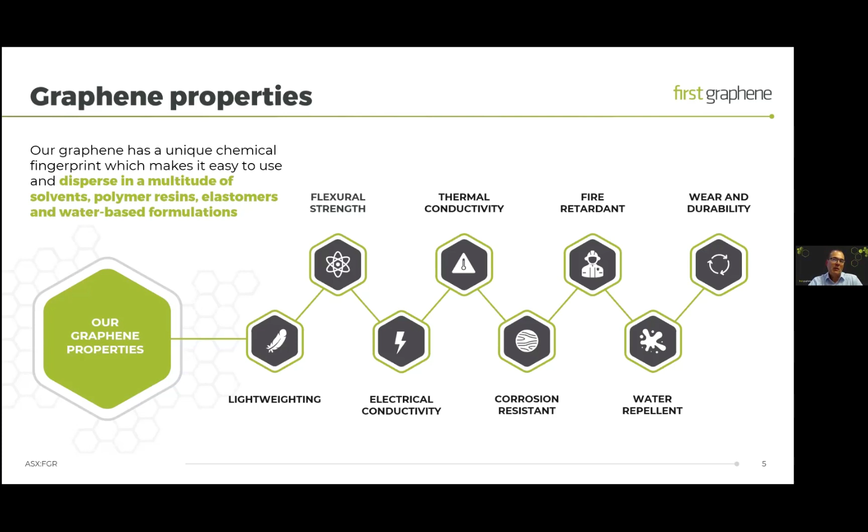So we're an Australian-based company. Our major manufacturing site is in Henderson, which is Western Australia. In the UK, we are a tier 1 partner at the Graphene Engineering and Innovation Centre, which is in Manchester. And we've been an active participant in getting graphene registered as a new substance in different regions around the world.

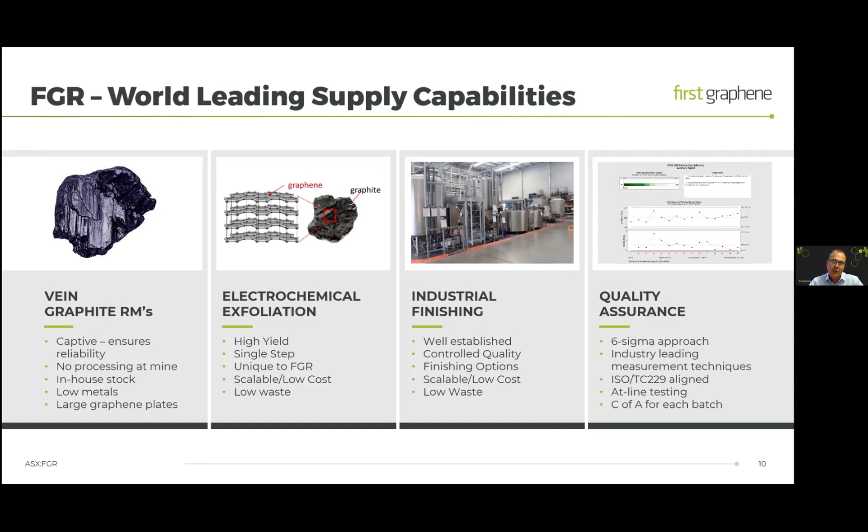The PureGraph product that we manufacture is a really interesting material because it is high aspect ratio, thin platelets, and we allow a small amount of oxidation at the platelet edges, which means that the platelets are easily dispersed and available for functionalization also. So we believe it's the highest performing graphene additive that you can buy in tonnage quantities. As I said, it's a pristine high aspect ratio platelet.

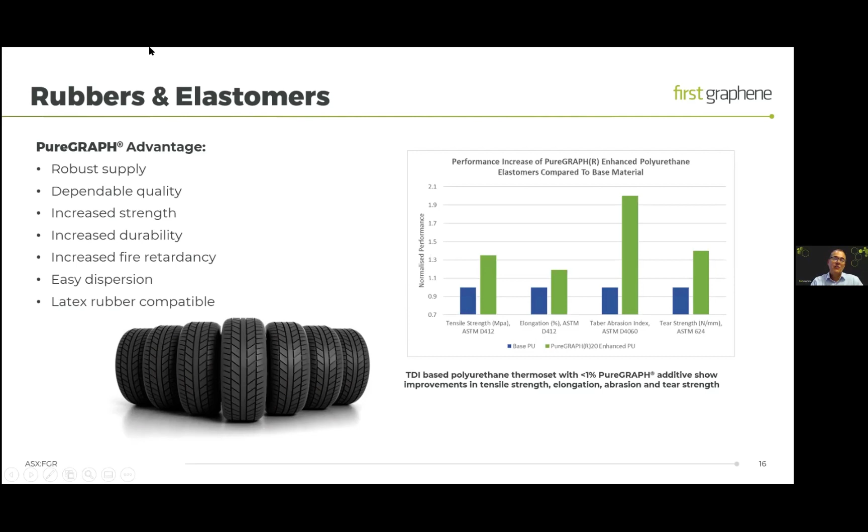So looking across this chart, you'll see we get significant improvements in tensile strength and tear strength in this elastomer, improvements in elongation, and really significant and positive changes in the abrasion performance, which we're now taking through to specific applications. So some of the customers and applications we're working with in rubbers and elastomers.

So with Steel Blue, we have an opportunity for PureGraph enhanced footwear. So Steel Blue manufacture specialist safety boots. And they're looking at graphene as an additive in multiple components within the boot to make the boot lighter, more comfortable, improve the grip, and improve the wear resistance. And we've been working with Steel Blue for probably 2 years now, and they will launch a PureGraph enhanced safety boot shortly in 2021, and they're a current sales client.

The second example here is newGen Group. So newGen are a supplier of wear liner systems to the mining industry in Australia. They've now launched a product range called ArmourGRAPH. ArmourGRAPH is typically a rubber system that includes our PureGraph as a performance enhancer. They've got tier 1 mining companies who are currently evaluating these and moving to adoption, and their interest, of course, is based on reduced cost of ownership.

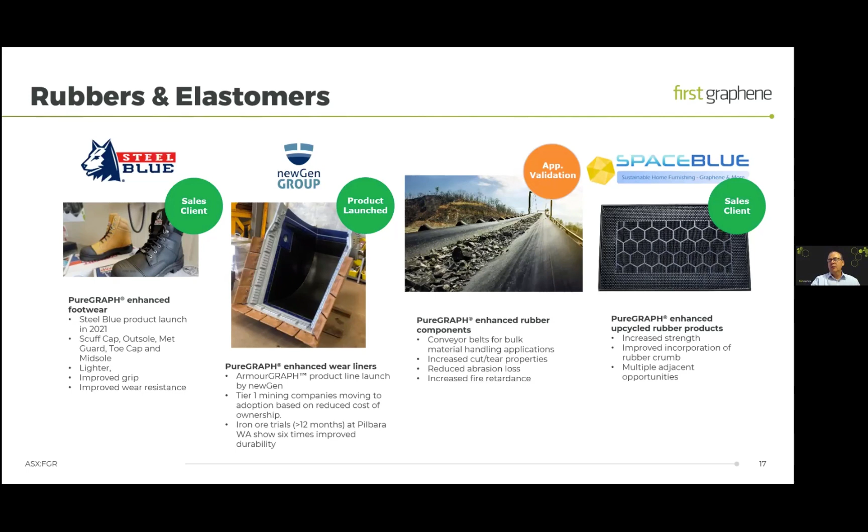So the next sector is composites and plastics. Here again, the PureGraph advantage is supply and quality, but in composites and plastics, we're seeing increased strength, increased durability, and improved barrier performance. So water, chemical, and gas barrier performance. The PureGraph materials are very easy to disperse into resins and plastics.

Some recent work that we just published an update on from the University of Warwick in the UK shows that the PureGraph materials are readily incorporated into thermoplastic matrices through normal extrusion processes. We can make very high concentrations, so 30% by weight concentration master batches, and plastic master batches are now available from First Graphene.

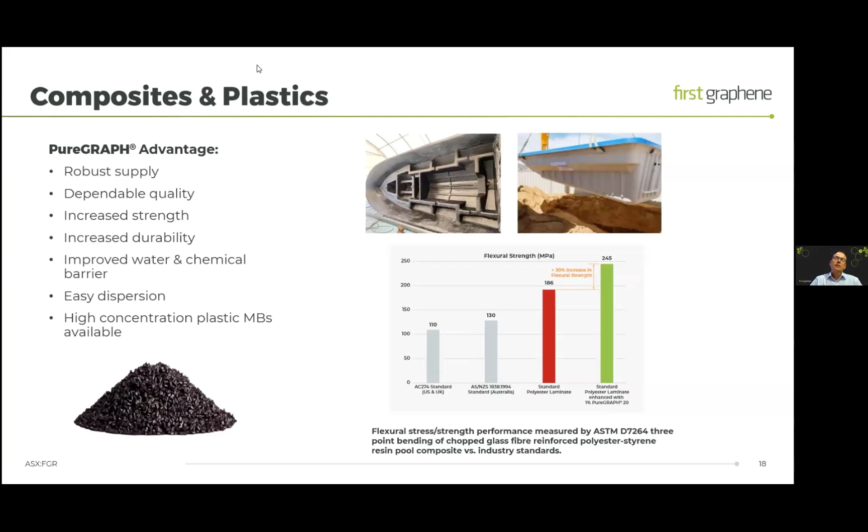So to look at some specifics, the company Aquatic Leisure Technologies is the largest swimming pool manufacturer in Australia. And they, last week, announced launch of a product range based on graphene materials. So the product range was launched in May. It's branded Graphene Nanotech products, and this will be incorporated across their entire pool product lines.

And what they've reported in these products is 30% increase in flexural strength, which enables a 30% lightweighting and improved water resistance, so improved resilience to water from the backside of the pool.

Also in marine, we've got multiple opportunities in marine. The one we are able to talk about is with Ascent Shipwrights, who are a sales client based in Western Australia. They have made a graphene boat. And if you visit our Twitter account, you'll be able to see a video of this being assembled, which is quite interesting. They're looking at increased flexural strength, increased stiffness, again, of course, improved water resilience, water resistance.

We're again seeing multiple adjacent opportunities in this market. So you may also have seen on Twitter the graphene enhanced surfboards, for example. So multiple opportunities in this marine sector.

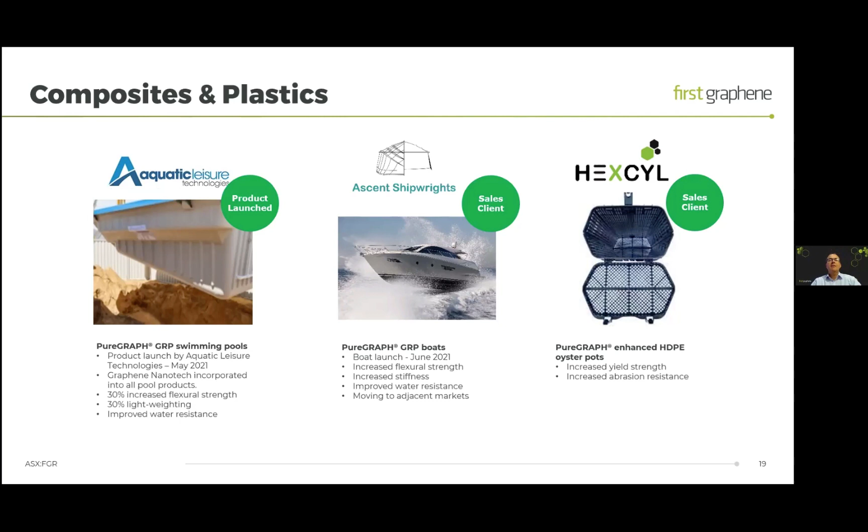Cement and concrete. Now, as Terence said, I've been involved in graphene for a long while. And when people 10 years ago started to talk about putting graphene into cement and concrete, this seemed kind of improbable. But we're seeing real opportunities here because the effect of adding graphene is effective at such low dopant levels.

So if we look at the concrete industry in terms of the big picture, it's an immense industry. After water, concrete is the most widely used material in the world. And the use of cement-based concrete contributes somewhere between 6 and 8% of global carbon dioxide emissions. So potentially increasing the strength of these materials by, say, 30%, you have the opportunity to reduce the amount of cement and concrete which is deployed, and therefore reduce the carbon dioxide contribution of the cement.

So what's the PureGraph advantage in cement and concrete? Well, again, supply and quality. Supply will be everything in this opportunity. Being able to scale and supply in the thousands of tons is essential to provide a concrete additive to this industry.

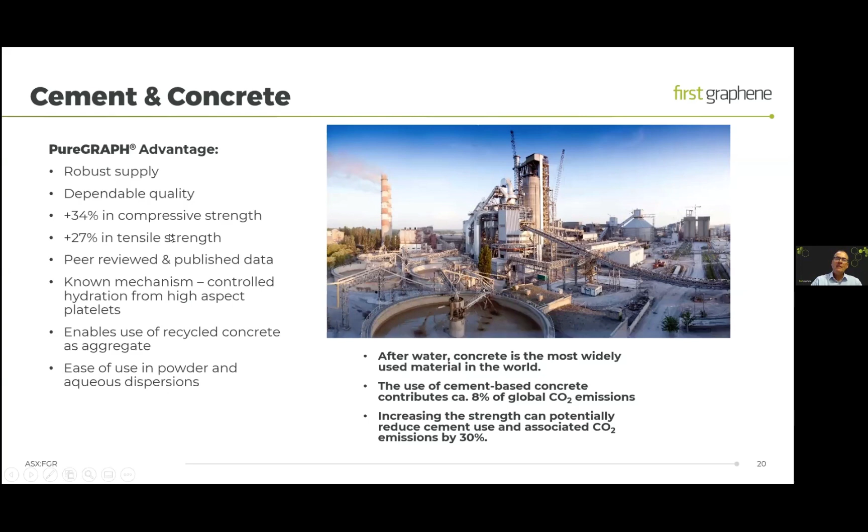So cement manufacturer, the industry is looking at many alternatives to ordinary Portland cement. So these systems that are being used typically don't perform as well. So adding performance through additives to these cement products is quite significantly important. So graphene can potentially increase the strength of these systems and also improve the integration of some of these alternative aggregates. And as I mentioned, recycled concrete is one of those.

In structures, obviously by adding PureGraph into concrete systems, increasing the compressive and tensile strength can have a significant impact on how structures are developed, designed, and constructed.

The addition of graphene will also reduce water penetration and therefore improve corrosion resistance. And it's also been shown to reduce surface abrasion of these concretes.

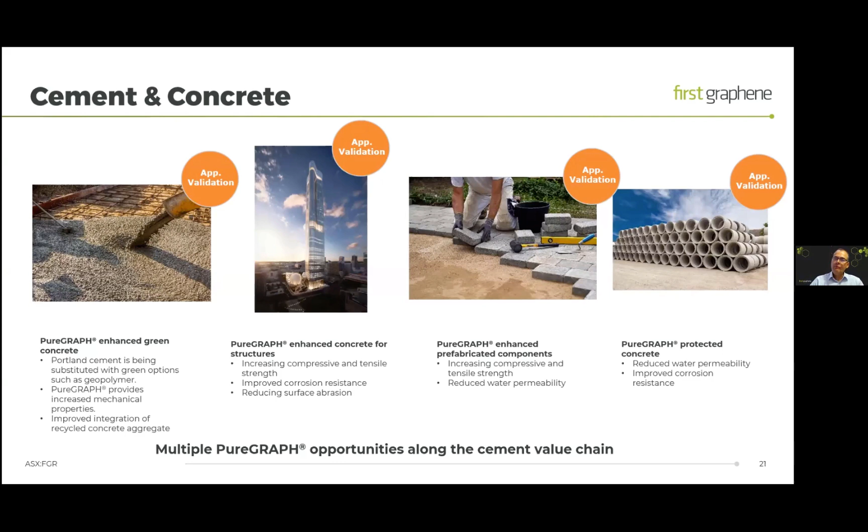So we've got multiple activities across this value chain, all of these applications in validation at some stage, and really exciting industry to be working with. So that was a quick run through some of the examples in the commercial sectors. We continue to look at innovative solutions, and we do listen really closely to our customers when they bring forward new problems and ideas. So we continue to develop the PureGraph range of products.

And as I said earlier, the PureGraph Aqua is a product we launched earlier this year. It's a really interesting material because it's a commercially available graphene hydrogel. It contains no surfactants, so it's essentially just graphene and water. And the water molecules seem to be present as spacers between the pristine graphene platelets. And of course, what this means is when you're dispersing this into a polar or a water-based system, the separation of the platelets is more straightforward, and you get better dispersion of the individual platelets.

And what this means is you have a much easier route to formulation in systems such as paints, inks, cements, and latex rubbers. And we've got multiple customers working with these PureGraph Aqua systems, and it is really interesting. The Aqua products themselves are available in all the same sizes that the PureGraph materials are available in. So 5, 10, 20, and 50 micron product sizes.

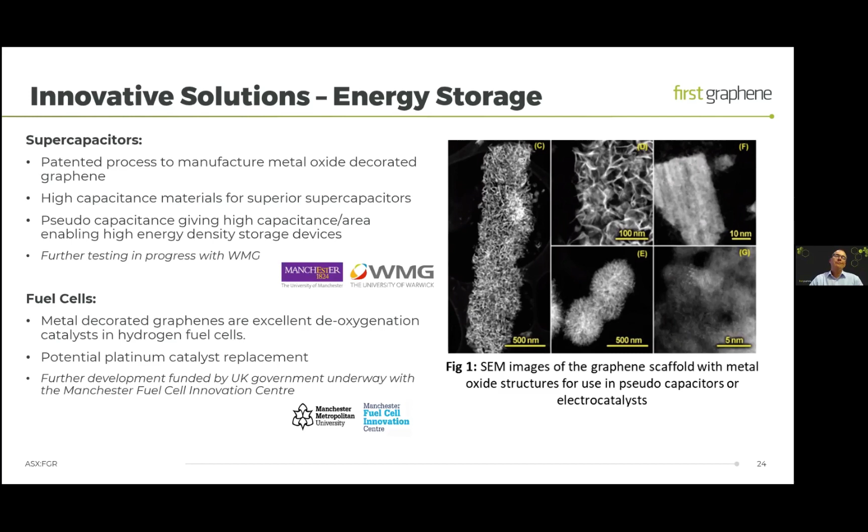There is obviously chemistry going on here, and the byproduct from the chemistry is hydrogen, which is really interesting. So it's a hydrogen byproduct. There is no associated generation of carbon dioxide with this hydrogen. So it's a sustainable route to hydrogen, ironically from a hydrocarbon feedstock.

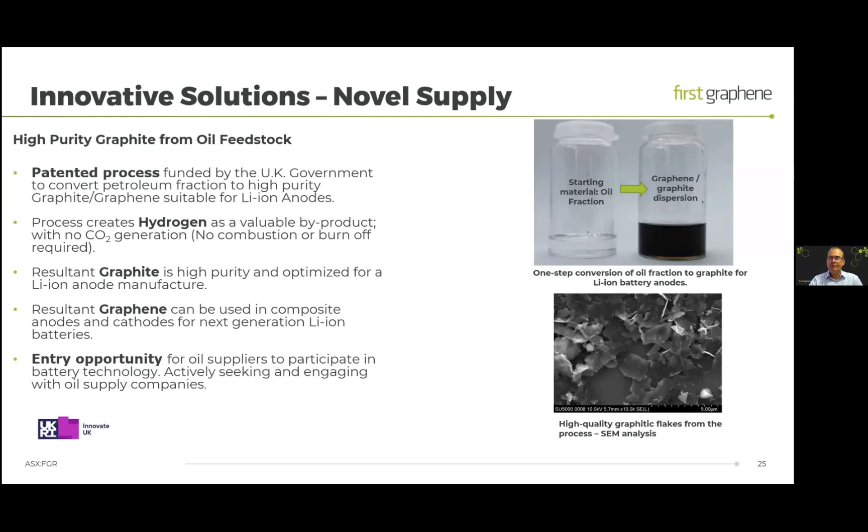So in February, we announced that we'd extend our relationship with Planartech. Planartech were manufacturing graphene-enhanced face masks using PureGraph, and they're now looking at a range of graphene-coated fabrics. Early in March, the report on the wear liner from the mining trial was reported, the 6 times increase, and that has since been validated by an independent auditor. Later in March, we announced a non-binding MOU with Gerdau in Brazil, towards agreeing a distribution agreement with Gerdau to distribute PureGraph and graphene products in the Americas.